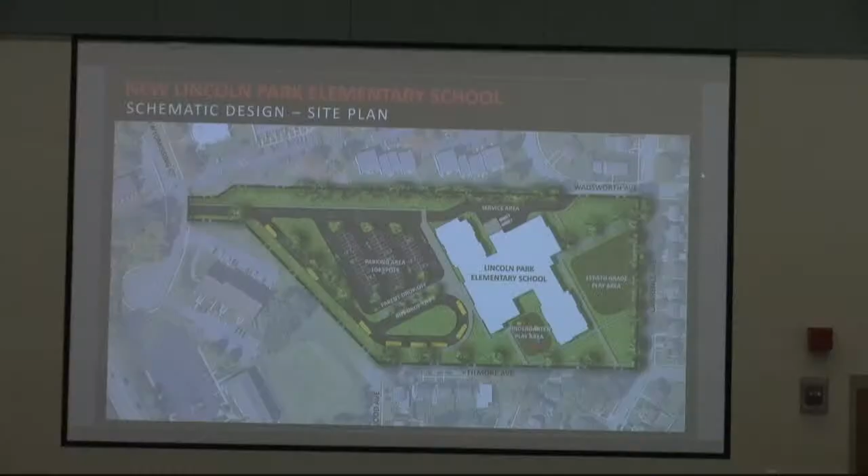So, moving on, the schematic design for the Lincoln Park Elementary School site plan is well underway. We've got a strong scheme going so far. We've turned it over to K&W engineers. We have the initial parts of the site survey complete, so they'll be starting to implement this scheme into reality.

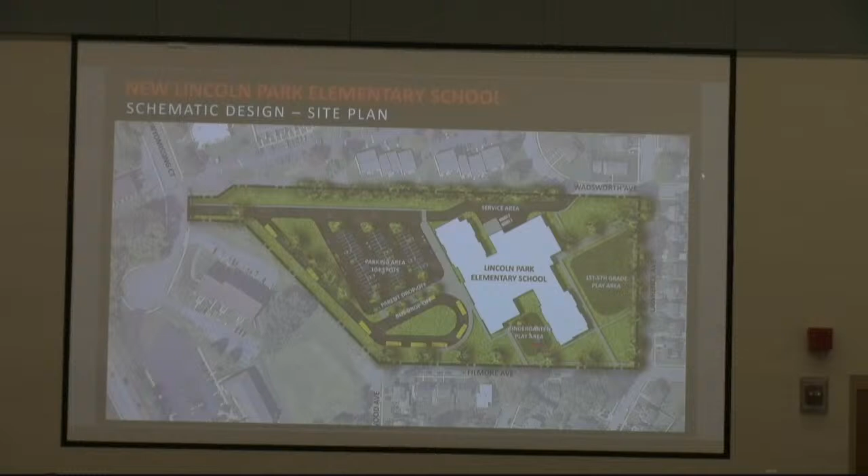So what we're showing here is the Lincoln Park Elementary School situated on the plan east side, favoring Lawrence Avenue a little bit, with a play area between the school and the neighborhood. That's specifically designed so that play area can be an active site in the evenings, on weekends, outside of school times. And then having the parking area on the planned left side, closest to where we're proposing the main entrance to the site, being off of West Wyomissing Court. That is a considerable thing that we're proposing here for a couple reasons.

One is we're really trying to keep the burden of the traffic away from the neighborhood, so using West Wyomissing Court seems to favor that significantly. And two, it's important to understand, and I'll get into this a little bit later, there are some zoning matters and site and property matters involved with that as well. I'll note real quick that the way we're situating the building on the site and where the mass of the building occurs is really a response to the neighborhood itself. You can see the building has offsetting wings.

The one toward the upper left is the two-story part. We're trying to keep that away from where the single-family homes are along Fillmore and Lawrence Avenue. The other wing is the one-story wing. The building will sit up on a bit of a hillside, so we're trying to keep the larger volumes and bulk of the building away from those streets where a two-story structure might not be so appropriate.

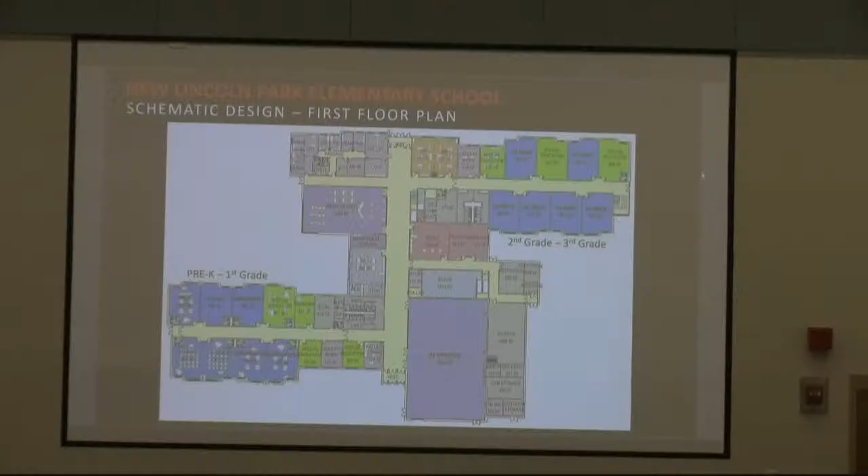So this is the first floor plan. You can see how we have the offsetting classroom wings. The main entrance would be on the top side, planned north. You can see we're proposing what we call a Main Street feature running north-south through the building that connects the classroom wings and all of the major spaces.

Our Main Street would first connect the second and third grade classroom wing, which is also the fourth and fifth grade classroom wing upstairs, before getting to the media center. On the left you can see music and art, and then the multi-purpose room, which would serve as cafeteria and gymnasium during the day and as an auditorium space in the evening, similar to your other elementary schools.

We're keeping all of those more public spaces right off that Main Street corridor, with all the classroom wings offset from that. All those classroom wings can be closed off for weekend or evening use, keeping the public out, but also for safety and security reasons. If you ever had an incident that you needed to shut down, those doors could be closed and locked from a flick of a switch from the administration office.

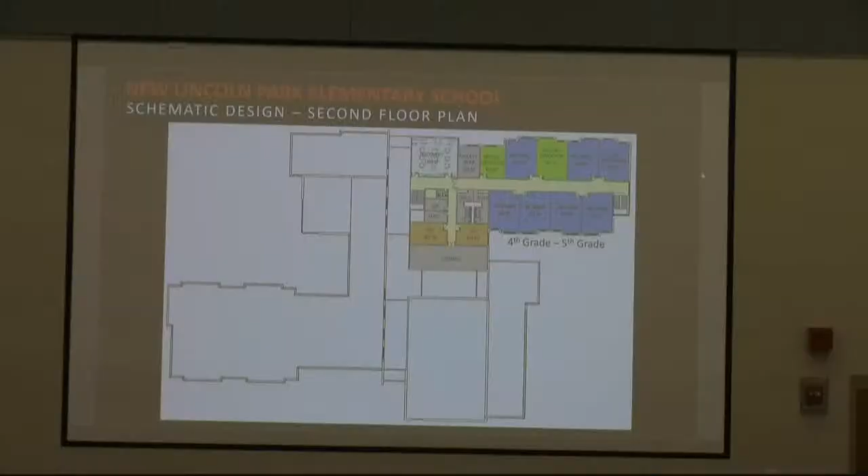Second floor - again, it's just the one wing getting two stories. I should mention we're trying to include some SGI classrooms on each floor, so we have a pair of SGI classrooms on each floor. On this floor, on the top left side of that program area, is a discovery classroom as part of the program for the primary curriculum.

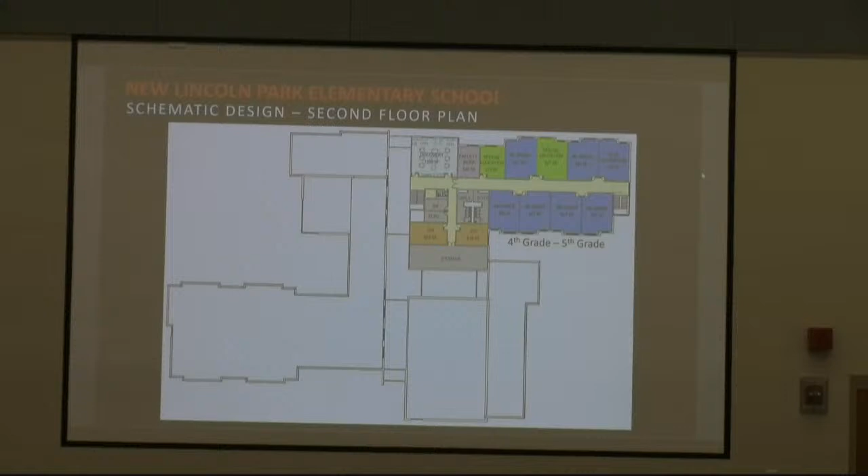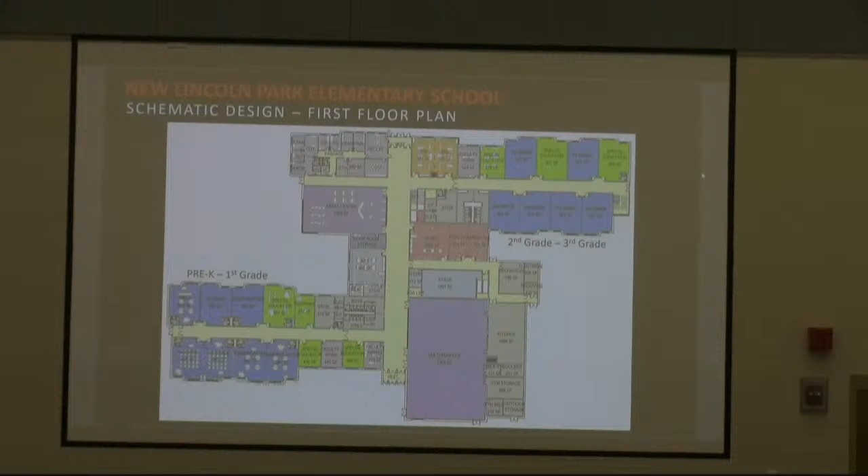On the first floor, right below that, is a pair of SGIs that would have a folding partition between them, so that can be opened up to a larger teaching space as well. We also have one extra flex classroom, which you can see on the top right corner of this slide.

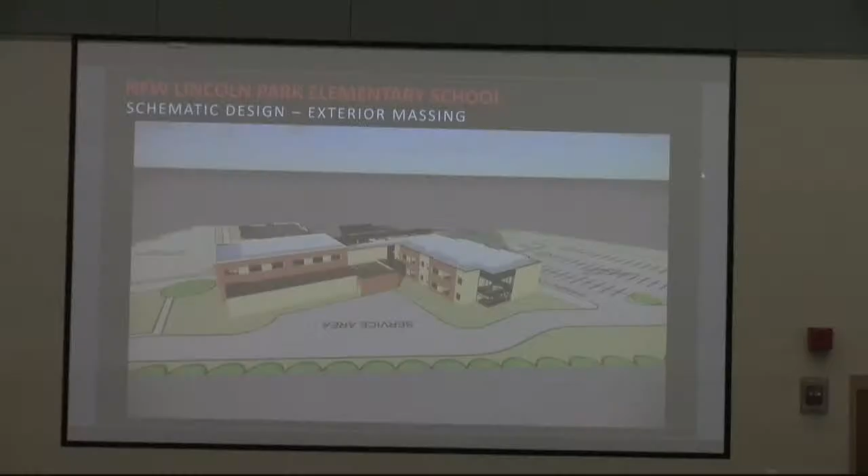This is the service side, and then you can also see the two-story classroom wing. What you see there kind of on the corner is the stairway for that second floor. We like to open those up if we can.

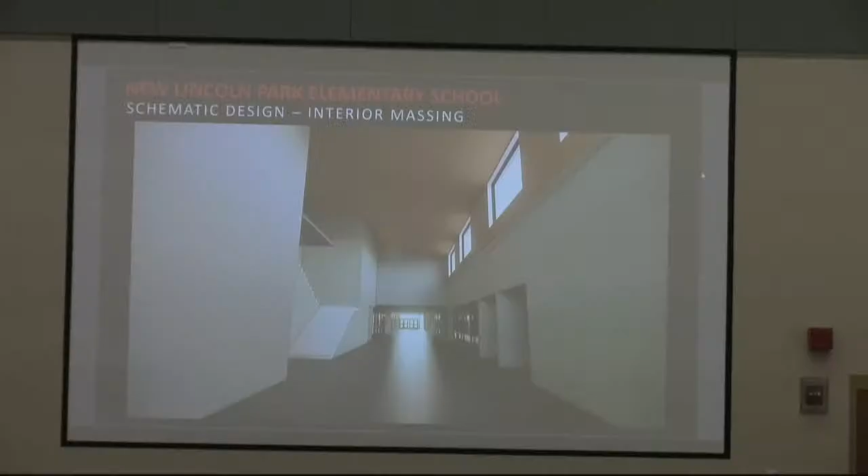Looking inside a little bit, again, this is just massing. We're trying to open up that Main Street corridor. There will be the stair to the left. Of course it will have railings and everything like that, but the idea is that stair will be kind of an active part of the design of the building. So any students going up there would be part of the whole procession to class at the beginning and end of every day.

What you can see there is part of the building, or that Main Street area, is a little bit lower. We're going to have some crossings for mechanical and plumbing, going from the mechanical room, which would be tucked behind to the left, over to the classroom wing to the right. So I'm anticipating we're going to have some point where we'll have to drop it a bit, but then when you get to the other side, it would open back up.

So you can see how we're trying to keep the multi-purpose room somewhat open to the corridor, or the Main Street area, keeping that as open and lively as possible. You also see that we're trying to do what we can to get clerestory lighting, natural daylight as best as we can into the core of the building, keeping it as bright as possible.

So of course there's going to be ceilings, lighting, mechanicals, all that kind of stuff. That'll start getting populated in the model as we bring our MEP engineers further involved. So there's a lot to be developed here, but you can see from a massing standpoint the concept that we're proposing so far.

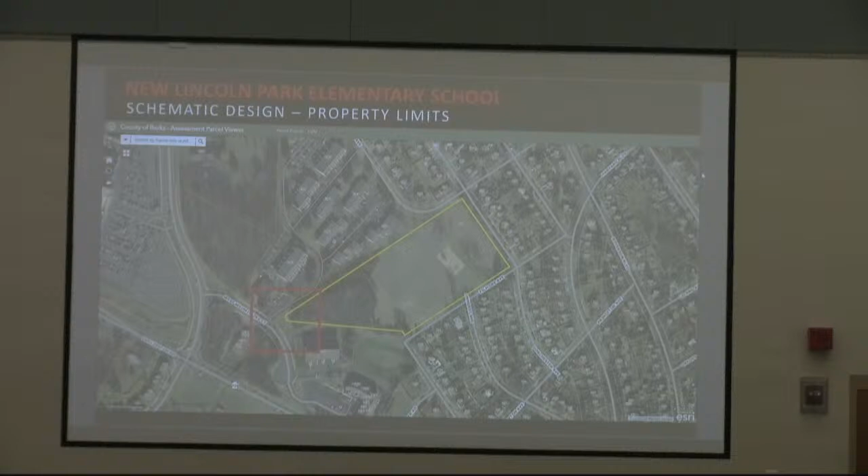So this slide touches on some of the things we're going to be working on over the next weeks and months, particularly from a site development standpoint. What you see in the yellow box is the current property lines. It's actually three properties, and we're going to have to merge them into a single property.

But the area where the red box targets or hones in on, what's actually happening there is your property line does not meet the right-of-way. It's actually set back a little bit from it, and there are two properties between your property and West Wyomissing Court. So one of the things we'll be working on over the weeks and months ahead is obtaining our right-of-way so that we can use West Wyomissing Court as a way in and out of the site.

Some zoning variances that we will have to obtain in order to do this. One is non-conforming use. That's an important one, and you might ask, why do we have to do that if there was previously a school already on this site of the same use? The reason is the size of the building we're putting in scales dramatically bigger than what was there before, well greater than 200%. So because of the significant increase in size, we're still going to have to obtain a non-conforming use variance. We don't see any challenges with that. It's just something we will have to take care of in the weeks and months ahead.

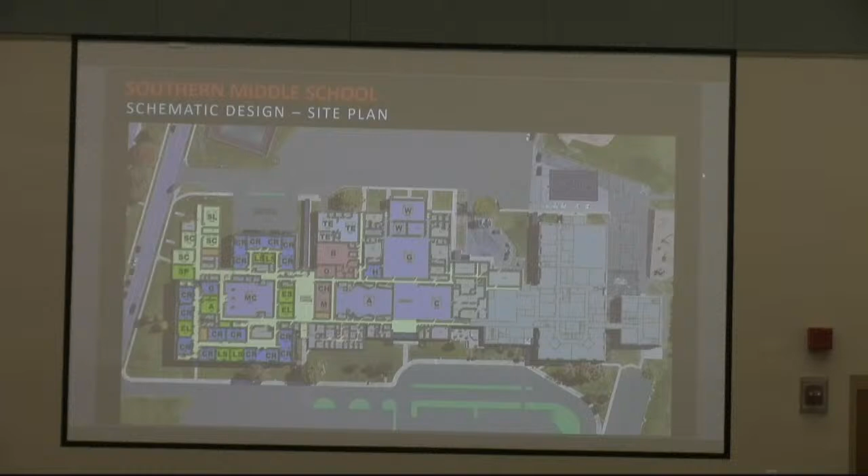So this is the overall first floor plan. I'll get into the building plans a bit more with blown up plans to follow, but looking at the site as a whole, the top left corner of the building is where the addition is—a 10 classroom addition over on the Windmill Road side. That addition will encroach on building setbacks required by zoning ordinance, so we'll be looking for variances on this property. But that is the addition.

There's also an addition right off the main entrance on the bottom side—all those rooms shown in pink. That's basically a new entrance, administrative area, guidance offices, and special education offices. We'll also be looking to make improvements to the event entrance toward the middle of the building.

For the site as a whole, we're looking to expand the existing parking, probably in the range of 20 to 22 spaces—we'll see when Civil gets that worked out completely. That parking addition is kind of a home run because we're going to be tackling stormwater and land development as a result of this project. We have to do something with that stormwater, and we're not likely to have room for retention ponds, so it's going to be underground. Since we're digging up the ground anyway, we might as well expand the parking lot as we cover it back up—that's our opportunity to do so.

And then, of course, on the far right-hand side is the elementary school, which we're really not tackling in this project at all.

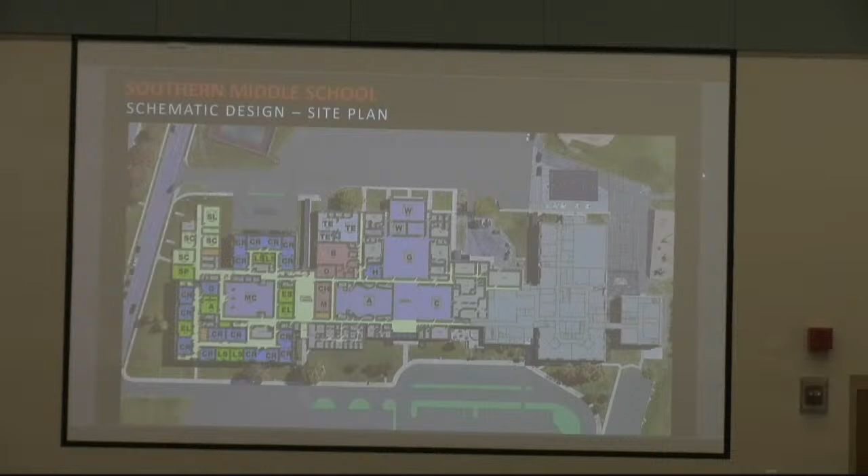Looking at the floor plans, what we're proposing is the 10 teaching space addition in the top left, primarily focused on science classrooms and labs. We have a total of 9 classrooms for science when it's all said and done—3 science areas per grade, increasingly larger and more populated with science equipment as the grades progress. The 6th grade rooms would be pretty much classrooms, 7th grade rooms would be classrooms plus some demonstration areas for teachers, and 8th grade would be full-blown science labs. So as you progress through the grades, the equipment, size, and furnishings for the science labs increase.

As far as classroom arrangements, around the bottom edge and left side of the classroom area will be the 6th grade wing, and the top side of the classroom area is the 7th grade.

That one, the 7th grade will actually span both floors, split between the 1st and 2nd floor. The 8th grade, as the slides will show, is right above the 6th grade on the 2nd floor. What we're trying to do is allow for some kind of breakout space, an open area, for every grade in the design. If I may, I'll use the laser pointer.

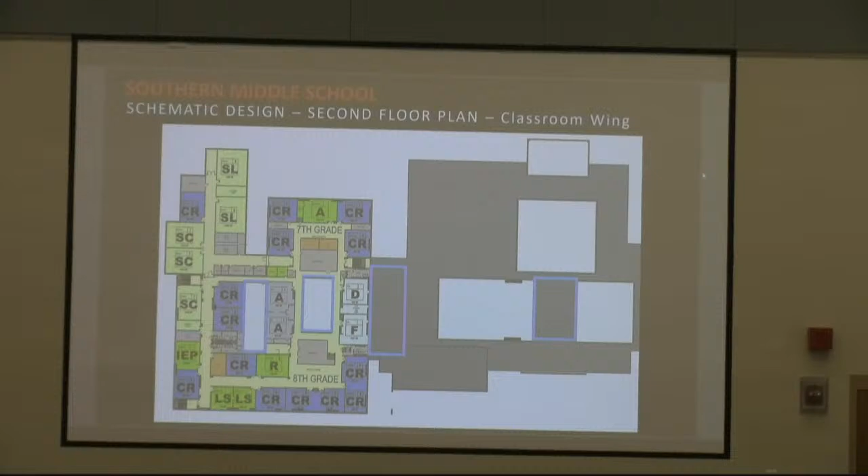So right here would be the one for the 6th grade, and then the 7th and 8th grade would both be upstairs, one right here and one right here. In all of those areas, we're taking out some undersized small group instruction or special education spaces and making them into open, collaborative breakout spaces that students can go to and be easily monitored by faculty for small group discussions.

As a result of the additions, we're able to relocate those programs that are being taken from those areas into more appropriately sized rooms. And that's a big driver for the project as a whole.

What you see here on the 2nd floor plan of the classroom area, there are boxes circled in light blue. Those are all areas where the roof is exposed, or there's roof over the floor below — in other words, the floor below is just a one-story area. Those are areas where we have a good opportunity to put in solar tubes to bring in natural daylight to all of those areas below.

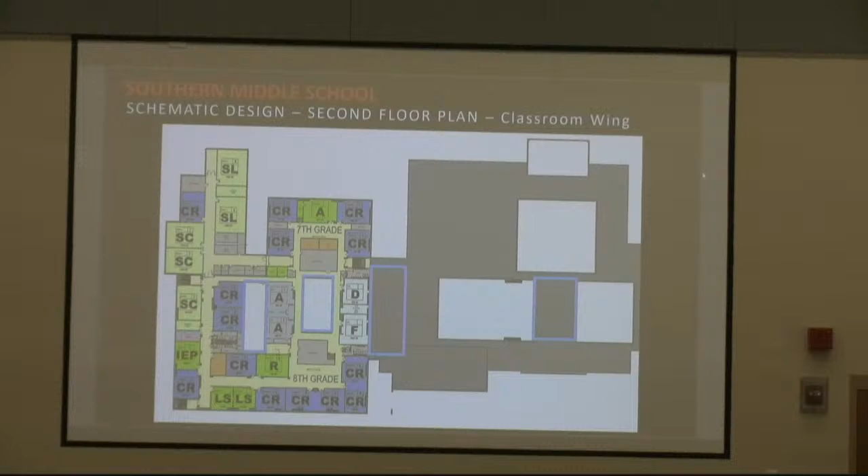So the 2 on the left are over the library or media center area, which is a great way to bring in natural daylight to the media center, and I think it will be really well received. The 2 on the right would be over the student commons areas that we're opening up. One is already opened up — it used to be the locker commons — and the other will be opening up as a result of some demolition.

So here you can see the 8th grade science labs — these are the larger science spaces. 8th grade also has one downstairs. It's just by nature of how the addition was laid out, given the site constraints.

So the addition will also, of course, have all the amenities we need to bring an addition on board, including the restrooms, data closets, staff toilets, and a little bit of storage, things like that.

One of the biggest challenges to the circulation around Southern Middle School is how students get from the area just south of the media center, over to this area and upstairs. That's a big bottleneck point circulation-wise. We are resolving that in multiple ways, as a matter of fact.

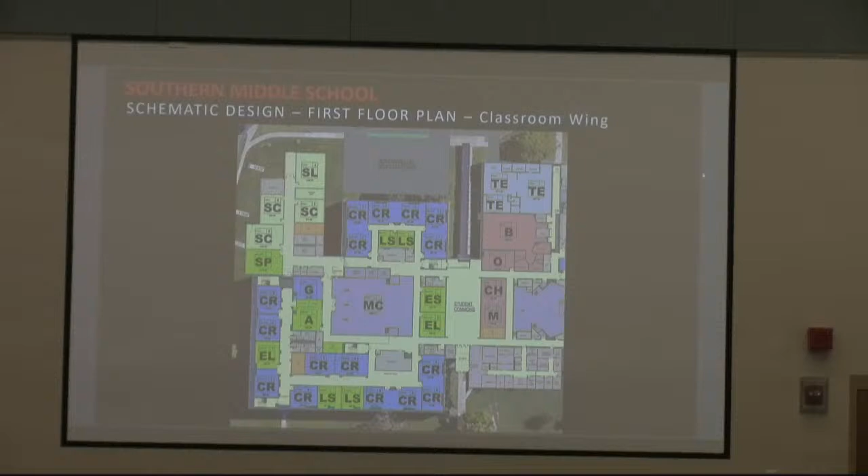Looking at the rest of the first floor. This is kind of the extracurricular side for the most part.

You'll notice that we're changing what is currently the administrative area just to the plan west side of the auditorium. We're making that a new choral and music room. Those spaces are currently upstairs in the classroom wing, which is pretty far departure from where the rest of the music program currently is, so we're bringing them much closer. They can also serve well as a staging area, or backstage area, for the stage during musicals and events in the auditorium. So that's a really significant move.

You can also see the administrative addition that we're putting on. And then largely, we're not doing a whole lot to the auditorium, the rest of the music, or the tech ed areas.

Around the gymnasium, the existing phys ed locker rooms, boys and girls on either side, are really oversized given how locker rooms are used today. So we're proposing shrinking them down a little bit, making them more appropriately sized, and getting rid of the group shower facilities since they aren't used at all. Then we're going to bring in a health classroom just to the plan south of the boys' locker room. That's really convenient because the health instructors usually are the gym instructors as well, so there's going to be a really strong adjacency between them. In fact, we're even including a doorway between the gym and the health classroom.

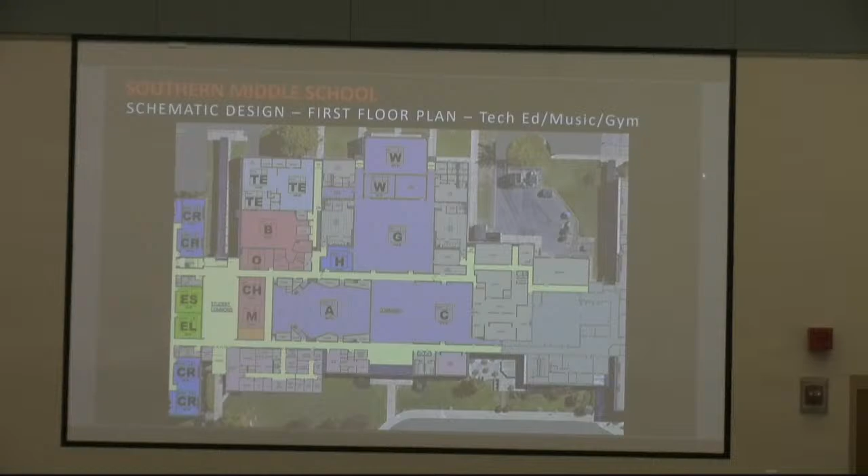So we look to be giving you some ideas in our coming meetings as to what that ultimately would look like. But I think you'll like having a nice open cafeteria, and also that may better suit the number of students.

We're also looking at potentially making some adjustments to how the serving area works within the kitchen. This is something we're still investigating, and I'll be looking forward to giving you more information as we learn more. I've been reaching out to food service consultants for some preliminary ideas. We've done things like this before, where we bring the serving lines out into the cafeteria itself and leave the kitchen operations behind. Those are some ideas we can look into, but they're still under further investigation. At this point, we're not budgeting for any food service or kitchen replacements, but if we elect to do a little bit of servery work, we'll add that to the budget and advise you.

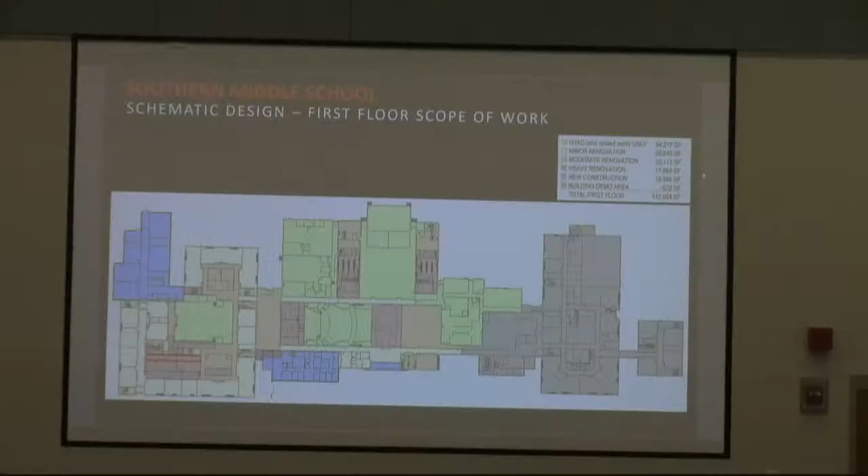So how do we tackle what this could look like as far as a budget goes? Well, what we're doing is breaking the building down into several different categories. Some areas we're going to be touching heavily, other areas not so much.

What we do know is across the board, the building requires an HVAC system replacement. So everything that is existing is getting that HVAC replacement. And when I say that, I also mean lighting replacement and ceiling replacements as well, because they would come along with replacing the HVAC equipment.

So what you're seeing here is the most heavily touched areas are areas in red. Those are areas that are getting walls totally demolished. We're reconfiguring entire layouts to accommodate this, and then all new finishes—the whole nine yards—casework, and of course the HVAC replacement.

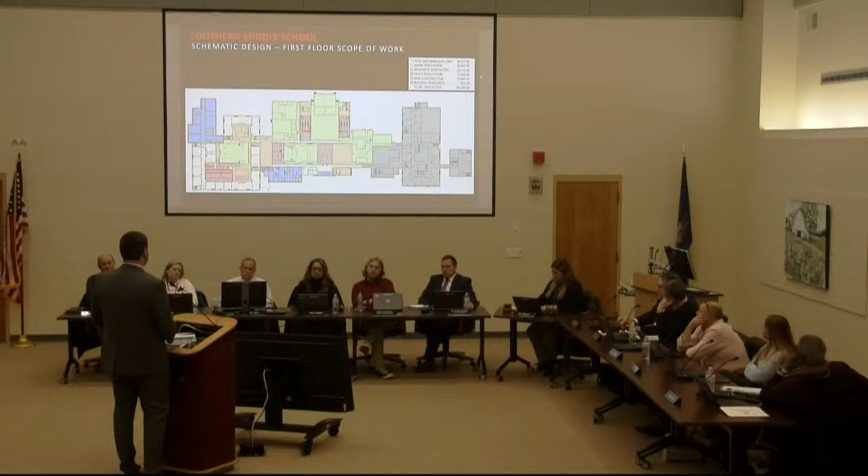Working down, orange means we're not tearing down walls, but we might be giving significant new finish work, casework where rooms require it. Yellow is a step down from that—we might be painting classrooms but not redoing casework, though still doing HVAC replacement throughout. Green is HVAC replacement only. The blue areas are the new additions, where we're providing everything needed to support new construction. So we're able to get square footages for all those different levels of renovation or new construction, and the same for the second floor, getting a tabulation for those.

That's how we can start to build what the cost estimate would look like. I do want to draw your attention really quick to something else.

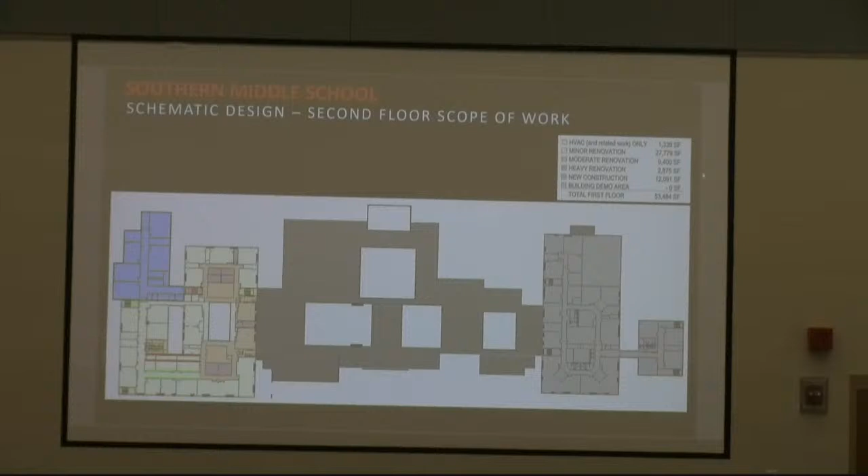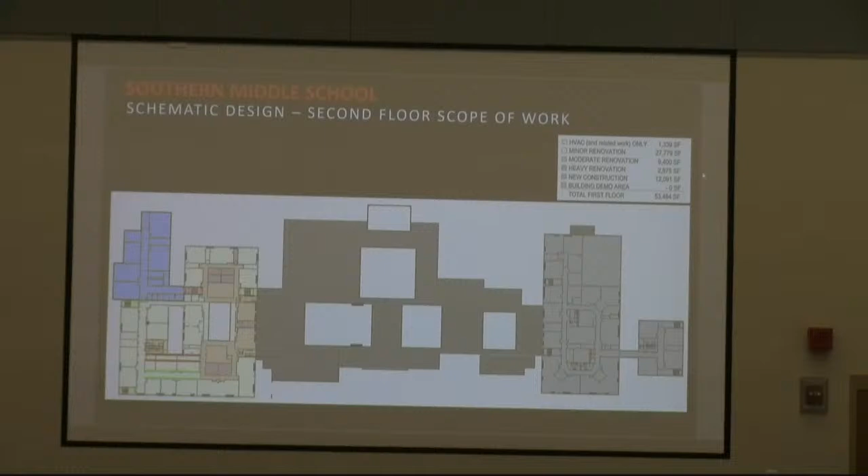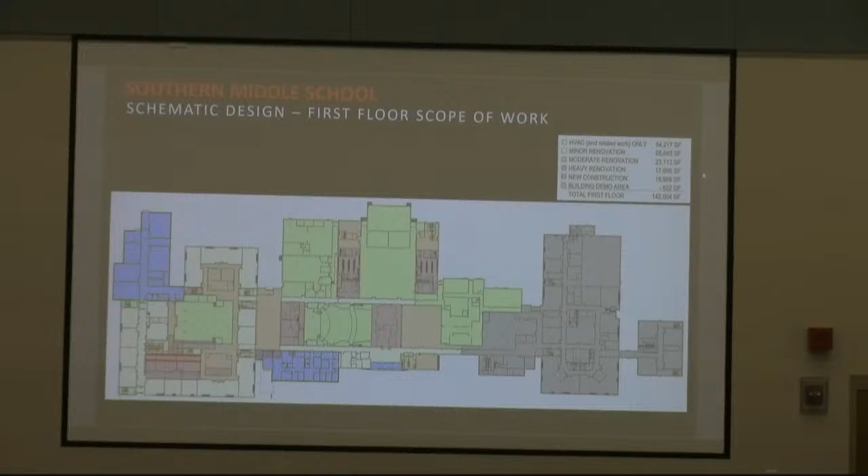At the second floor, you can see I've drawn some heavy red and heavy green lines. The green lines show where the corridor currently is on the second floor. The red lines show where the east-west moving corridor is on the first floor. You can see they don't stack up. It's a steel structure building, not masonry load bearing, so that frees us to make some adjustments that help with the flow of the building on the first floor. So we've elected to move the corridor on the first floor, plan south, so you effectively have a double-loaded corridor with classrooms on both sides, just like on the second floor. That's what allows us to reconfigure the ramp around and through the media center area and help improve your circulation problems currently encountered at the middle school.

We take those square footages of the various levels of renovation, and through projects we've bid recently, RSMeans, and other data sources, we're able to produce dollars per square foot for each of those different renovation levels. So you can see HVAC only, minor renovation, moderate renovation, and so on, all the way through new construction. We've also recently bid a very similar project, as it turns out, in Lebanon County, and those bids turned out favorably, so there was good data to pull from for estimating.

So at the end of the day, where we're sitting right now for a total project cost estimate for Southern Middle School is $44.7 to $49.4 million.

As a comparison, if you were to do an HVAC-only project, not making any renovations or changes to educational program or anything like that, we're estimating that to be around $14.6 to $16.1 million. Again, that would include lighting and ceiling replacements.

It is a slightly lower number than I presented to the Facilities Committee last week. We went back and talked with the engineers about that. Previously, we were just assuming it would take on the HVAC-only renovation cost, which we're saying is $65 a square foot from the renovation project, and attributing that to an HVAC-only project. But in reality, that's not quite the case—if we're not renovating anything, all of the electrical wiring above the ceilings would not have to be replaced. What we do have to do if we're renovating is replace the wiring, because the areas above the ceilings are called plenums—that's where all the return air is going from every classroom, and it's not ducted. So when we're using plenum returns, all of the wiring within the plenums, low voltage wiring, power wiring, has to be plenum rated. If we're not renovating, that's not a concern. So that's one area where the cost did go down a little bit for the HVAC-only project.

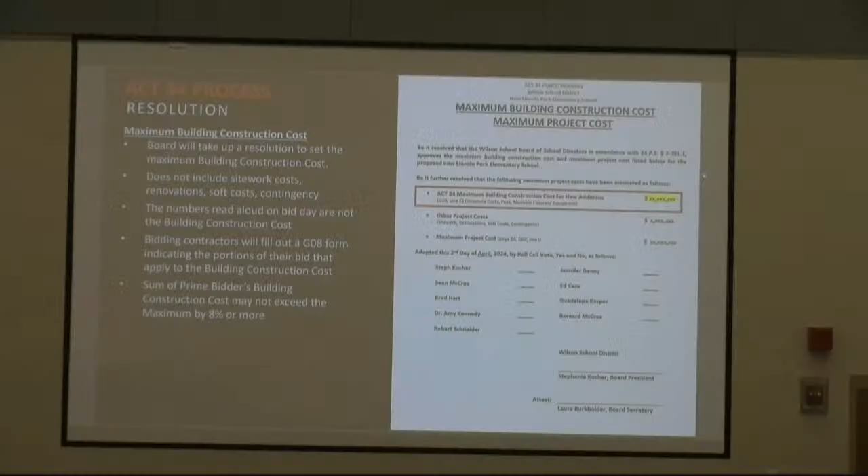So that resolution is for maximum building construction costs. On the right, you can see this is the page that would go into that Act 34 booklet. We'll be talking about the maximum project costs, the all-in costs, as well as the maximum building construction costs for the new additions. It's that maximum building construction cost that is the key number here.

We'll be advising you of that number probably sometime mid to late March. Let you think about that, discuss that as a school board, and then you will take up this resolution in April, and this resolution by roll call vote will become part of that Act 34 booklet.

That maximum building construction cost is not that bottom line number that I'm presenting to you today, not that estimate. It is not the number that when you add up all the successful prime bidders' numbers. It's not that number either. What it is: the building cost minus site work, renovations if that applies, soft costs and contingencies.

So on bid day, when the contractors submit their bids, they're also going to be submitting what's called a G08 form. This is one of the PlanCon forms where they will attribute what portion of their bid applies to the maximum building construction cost. And then when you take all of the prime contractors' G08 numbers and add that together, that's what you get for the maximum building construction cost. We can estimate that and advise you on that number, and then that's what you will take as a resolution.

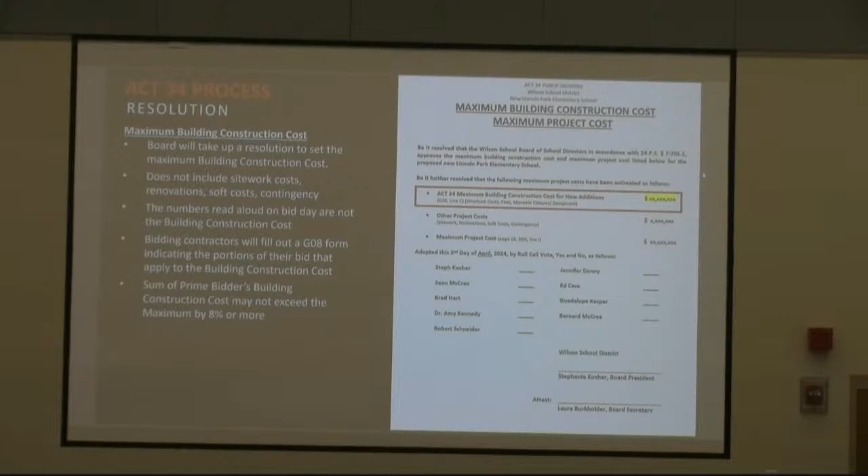And then, after you resolve that maximum building construction cost, I'll present to you that booklet, and again, we'll probably allow you to discuss it as a board, think about it, and then at your following meeting, you'll take a vote to approve that booklet. After you approve the Act 34 booklet, it will be advertised for a public hearing.

That advertising has to occur for a minimum of 20 days. It'll go to the local newspaper, and then after that 20-day period, there would be an Act 34 hearing where, again, we'll be presenting all of this publicly. We tentatively have that scheduled for May 8th. After the Act 34 hearing, a 30-day comment period will commence when the public can bring in comments to you. And then after that, that is pretty much it.

If this were a reimbursable project, there would be more steps after that. But they're not reimbursing right now. PlanCon is not currently funded. So that's pretty much the end of the timeline for Act 34.

So, funding. Good evening. It does go fast. Here we go. Am I making you seasick yet? Okay. Wow. Okay. We're going to start there.

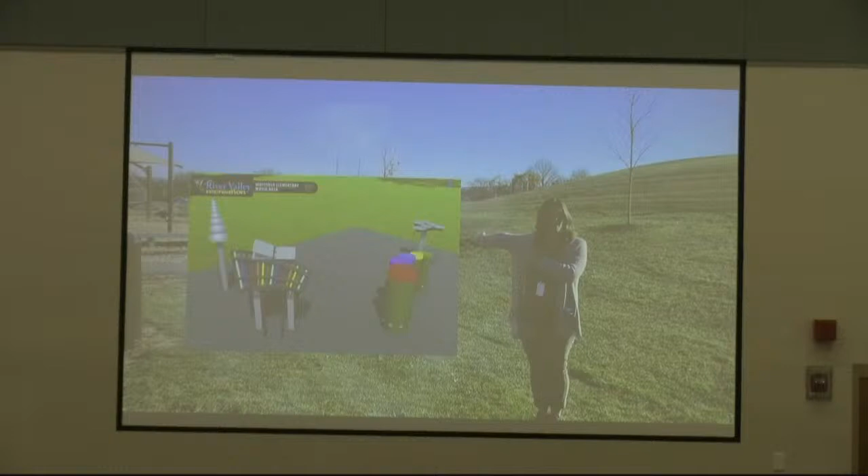Thank you, Dr. Kennedy. It's hard to vote no after that. Oh, I should thank poor Mrs. P, who picked maybe the world's worst board meeting to come to. So, I'm so sorry. But thank you for being so supportive.